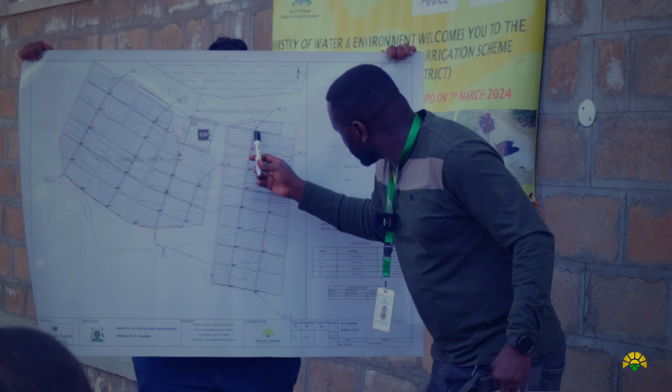We have been undertaking a training with our regional teams, especially in the east and the north this time around, and this includes the whole project team and the Ministry of Water project. By the end of this session, we should be able to set out without a template and check the diagonals when they are accurate. Once you visit the site, you have to make the visit count, so there are some things you can just spot check and look out for, and immediately we can correct that.

At a pump station, we give you the corners of the chain link fencing. You're looking for a reservoir location. Put the reservoir location from the drawing, and then together you look for it. What have you got? Now you change yours to square meters.

Continuous capacity development is really required, and we're looking forward to do this with the construction manager of South and Southwest, Mr. Shock, so we get ready.

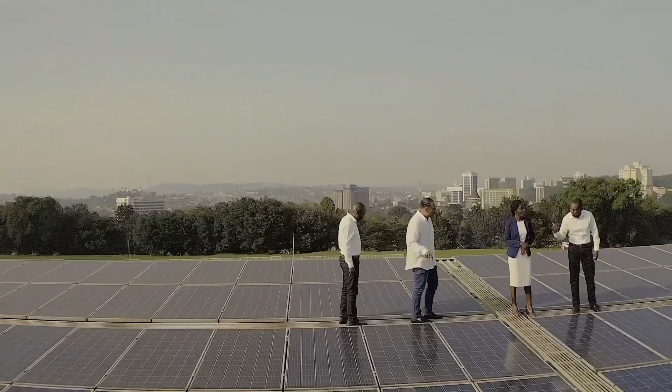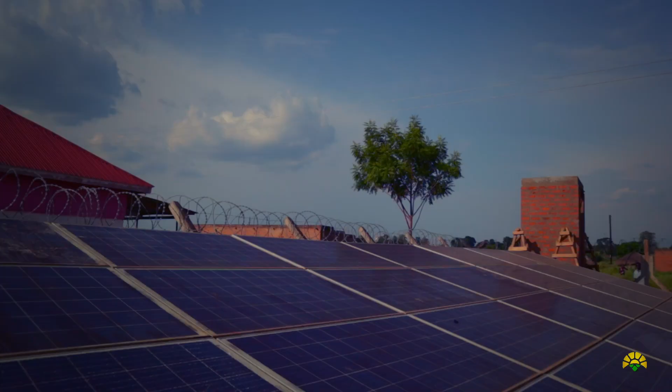We are Nexus Green, Uganda Limited, subsidiary of Nexus Green UK. We are the biggest renewable solar energy solution company in Uganda, and we have a couple of projects we are running, one of which is the Ministry of Water.

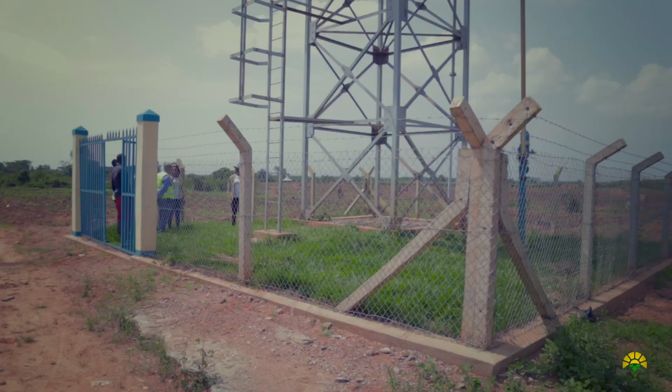The project is called Design, Supply and Installation of Solar Powered Water Supply and Irrigation Systems, which is undertaken by Government of Uganda through Ministry of Water and Environment. This is funded by UK Export Finance with GOU.

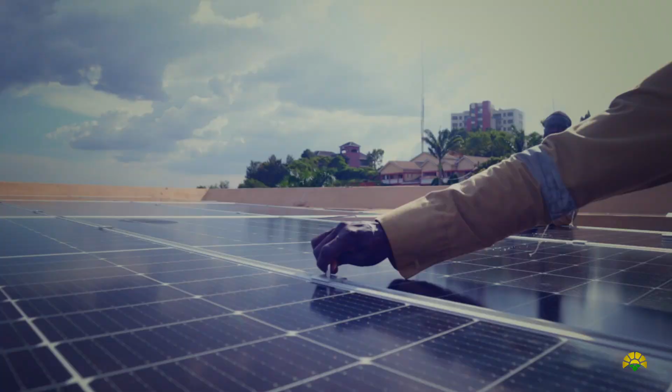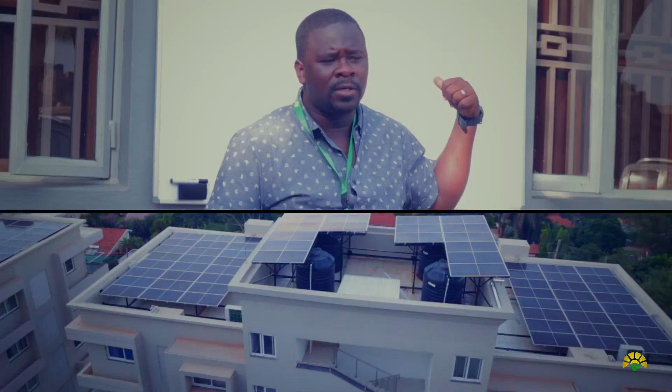We also have a couple of projects under our B2B section, business to business, where we are providing energy solutions. We have AGL, we have done Summit View, we are starting AGL Nairobi, I think next week. So we are here for the long run, we are here to stay.

This training comprised of clerk of works, who are our team working directly on the project sites and supervising every contractor or subcontractor undertaking this work.

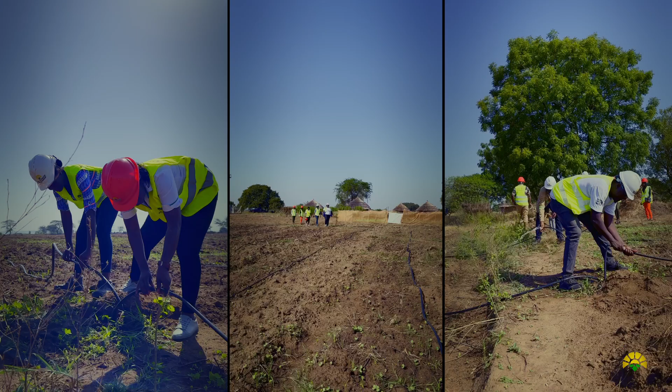Nexus Green has the A team. We have collected all the A team in this country and brought them to Nexus Green. While you're with Nexus Green, bring that A game. We have a slogan, beyond and above. That's what we aim for.

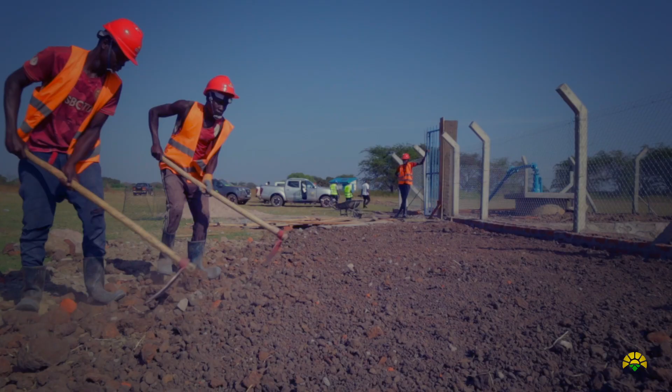We have a client, we don't just do the work, we go above and beyond. We want to leave the client awestruck by the quality of work, the time management, and the cost within which we provide our solutions.

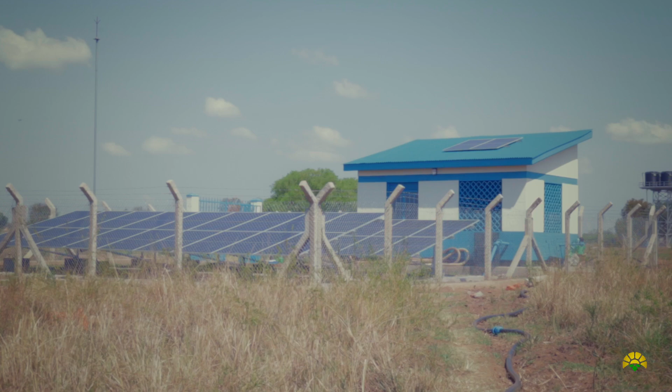It's always important to build capacity so that you maximize and save time. When people get to know how to do the work, what to do, in the process there's efficiency, and productivity is increased. That is one of the reasons that enabled us to do that.

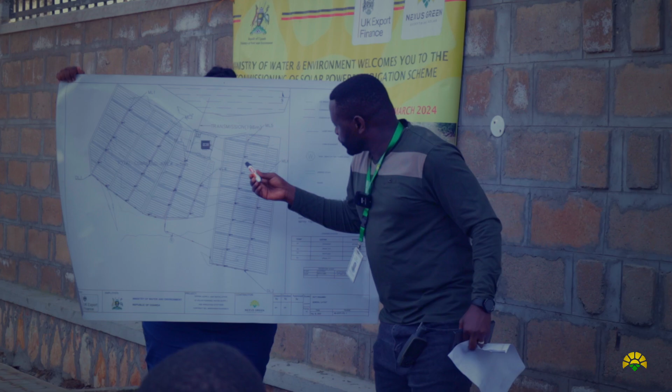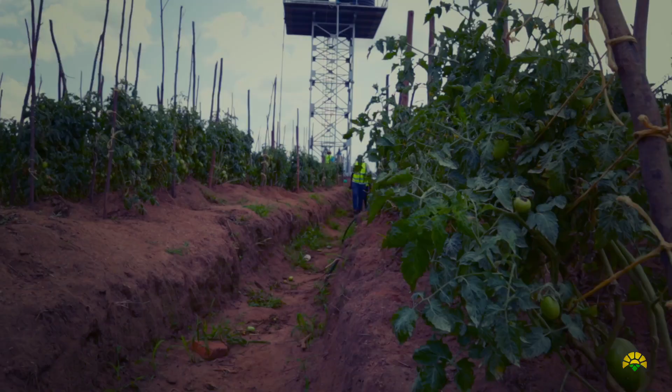We were contracted to design, procure and supply 687 solar-powered schemes, water supply and irrigation alike. You are currently being onboarded from the east, where we have 94 sites running and about 20 ready for commissioning, 7 commissioned with official handover and a certificate and all that. We have about 68 more to go.

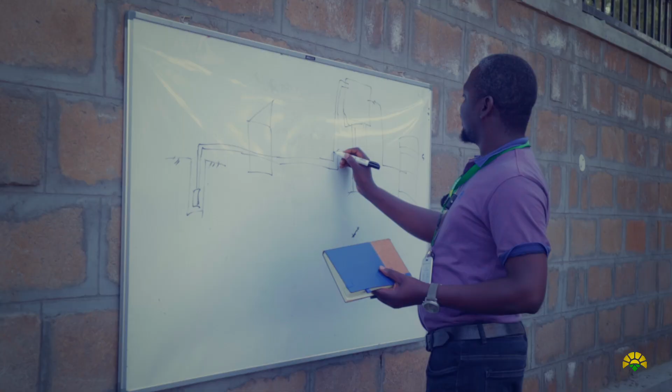We looked at the designs. How are they made? How are they developed? What process does it go through? What quality assurance is there in the design process, so that the whole workforce appreciates the effort from the design team.

We share with you setting out information which is in coordinates. What we are using, the coordinate system we are using, is a WGS 84 datum, and then it is a UTM. But sometimes you find some surveyors are using Arc 1960, which is a bit tricky, but you need to pay attention to that datum, the WGS 84 setting out information.

For example, if you are laying an irrigation scheme, the moment you finish trenching, before you put the first distribution main line to the garden, I need to be there as a clerk of works. In some instances, you find we have a block of 24 by 60 and 18 by 60.

Is 18 a challenge or which one? Now it depends on the limitations we meet when we are designing, so we decide. Before, we used to adopt 24 because we had 8 lines, which is 8 times 3, 24. But we changed it to 7.

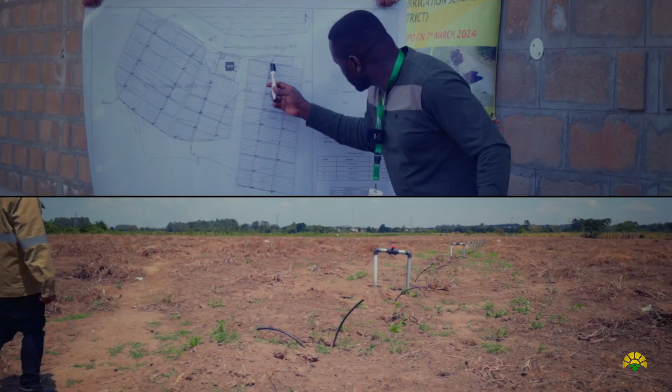You have this and this being powered by one valve. This and this powered by one valve. This and this powered by one valve.

Now, if we extract 2 boxes here, you have that. Then you have a line from somewhere passing in the middle. Then you have laser spray, blank tubes punched at 3-meter distance.

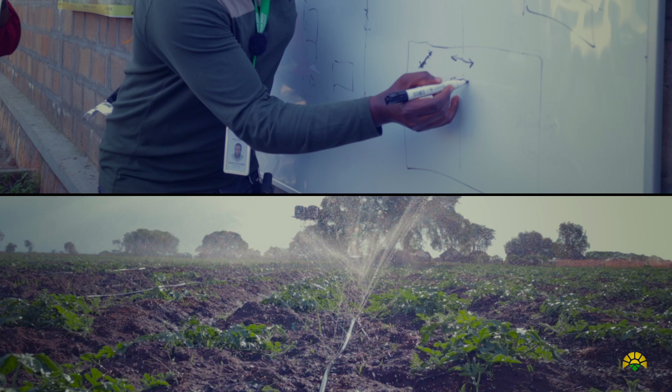We normally use around 7 of them. So 7 per block times each side is 30 meters. But if you meet 8, please do the 8, because that's what we have decided to do.

Sometimes we can lay it and feel like we'll have 4 lines hanging alone. Then we say, no, let's distribute them in each block. So each block gets 1, 1, 1, and we have a new valve coming up. So all those are decisions taken during design.

We also went again to understand programming. How do you do programming? Because at the end of the day, projects are about time and cost.

Most of the items on our work breakdown structure, in that document, these are actually headings in our bills of quantities. So I believe the team is aware. Literally, our main role is we are accountable for this data, but also we are responsible for validating data which comes from our civil subcontractors or our supply chain.

So planning is this. We need these dates from the contractors, when they actually intend to give us the site, for site handover. Always make sure that when that day has passed and you haven't achieved the milestone, you ask for a recovery plan.

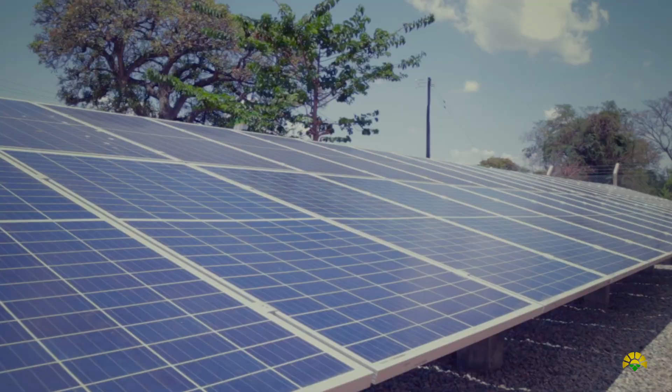Quality assurance is very important for us because it is the cornerstone of why we thrive as Nexus Green. At the end of the day, customer satisfaction is everyone's responsibility at Nexus Green, and that's why quality assurance is a very integral part of our process and systems. You just need to pay more attention to detail.

This is why we came here with our procurement officer, because she's going to run you through from the borehole, where you first drop the submersible pump, to the last point where water is fed to the end user or to the crops. We have a material acquisition template.

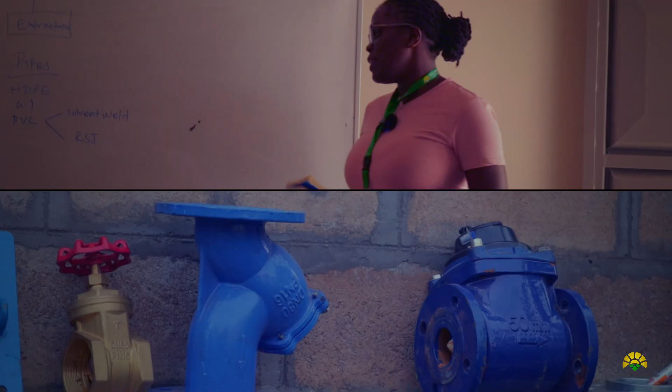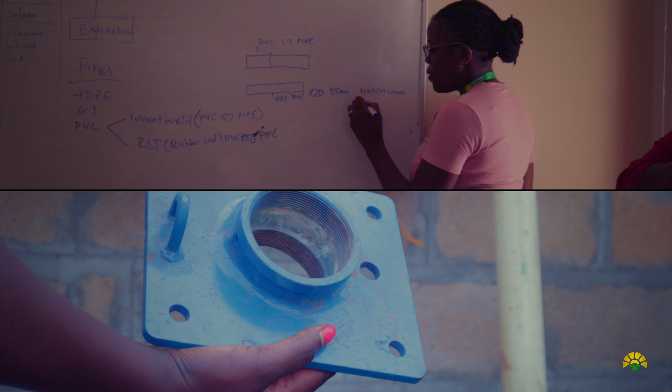Now in that material acquisition template, we have some pipes. If it's OD 110 millimeter of pipe that we're using, either in the transmission, getting water from the pump house to the reservoir, or in the distribution, say in water supply sites, this is what we use.

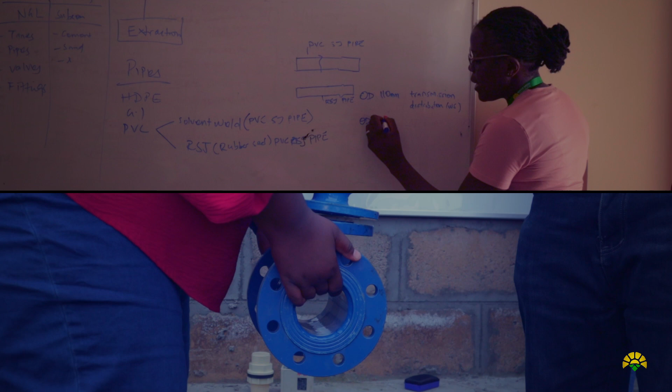For the sizes that are lower, like OD 90, 75, 63, 50 and downwards, here we use HDPE.

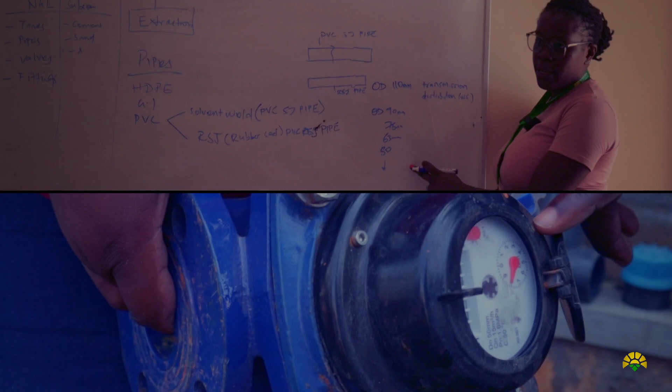These are important activities we have been undertaking these 2-3 days, and we are glad that at the end of the day, these colleagues of ours, this workforce, are really motivated. Their energy is revived, and they have something that they can see and focus on and know exactly how to do and deliver.

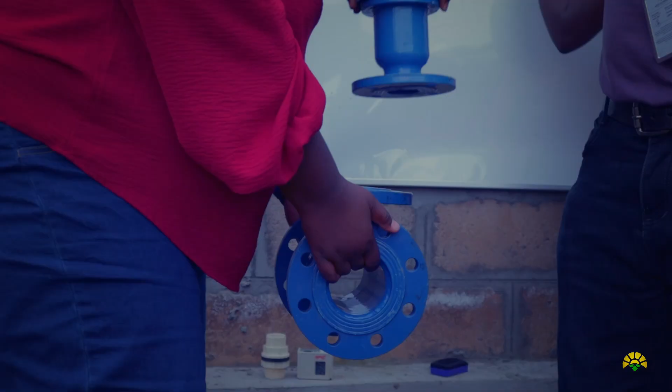That is why continuous capacity development is really required. So we are looking forward to do this with our regional team in Southwest and in Central Uganda, and we are looking forward to do this with the construction manager of South and Southwest, Mr. Shock. So let's get ready, get ready, get ready.